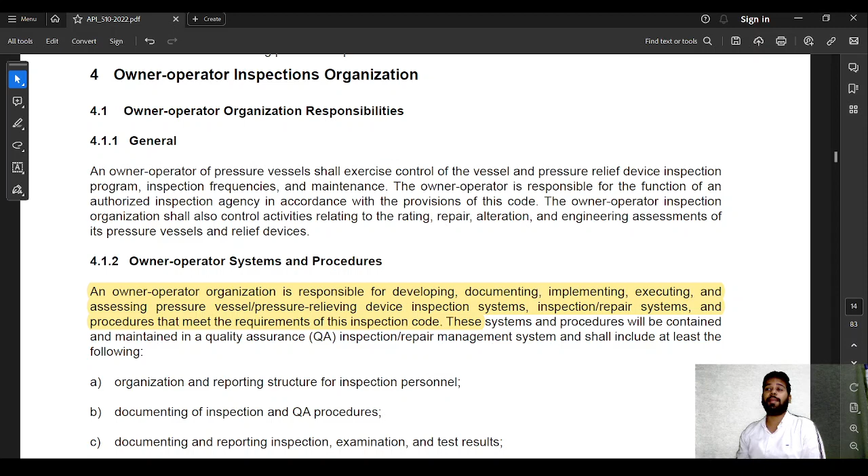In this video, we are going to talk about section 4. Section 4 lays down the requirements for owner and operator organization: what are the responsibilities for the owner or operator working with that pressure vessel, what is required for the inspector, what are the reporting requirements, and what are the qualification requirements. All of these things are laid down in section 4.

So generally, the owner operator of the pressure vessel shall exercise control of the vessel and pressure relief device inspection program, inspection frequency, and inspection maintenance. The owner operator is responsible for the function of the authorized inspection agency in accordance with the provisions of this code. This means the owner is responsible if the authorized inspection agency is not working correctly, because the owner is the one who has hired them.

Next, the owner-operator inspection organization shall also control activities related to rating, repair, alteration, and engineering assessments on the pressure vessel and relief devices.

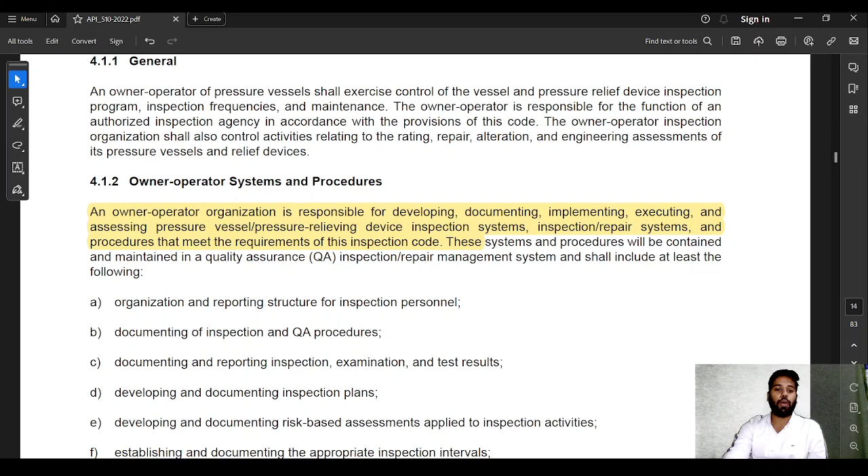The owner-operator system and procedures: an owner-operator organization is responsible for developing, documenting, implementing, executing, and assessing pressure vessel and pressure relieving device inspection systems, inspection and repair systems, and procedures that meet the requirements of this code. This means it is the responsibility of the owner that the inspection plan was developed, documented, implemented, executed, and assessed, whatever the results were after inspection.

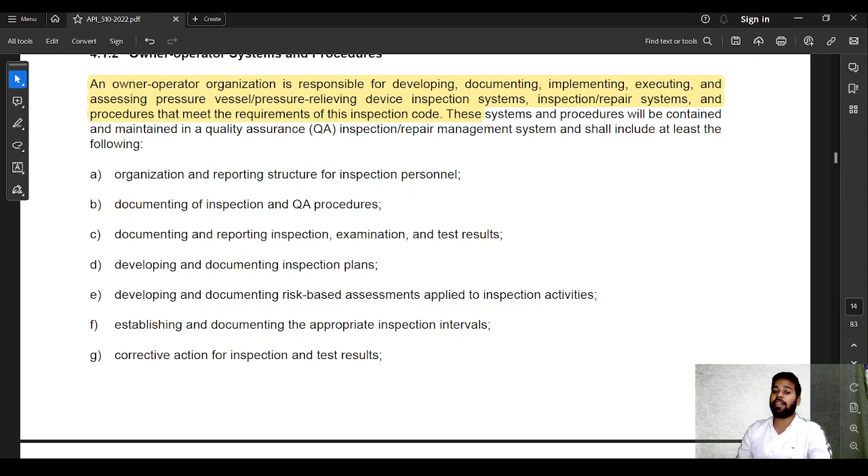These requirements and procedures will be contained and maintained in the quality assurance inspection or repair management system and shall include at least these items: organization reporting structure, documenting of inspection and QA procedures, documenting and reporting inspection and examination and their test results, developing and documenting inspection plans, and risk-based assessment applied to inspection activities.

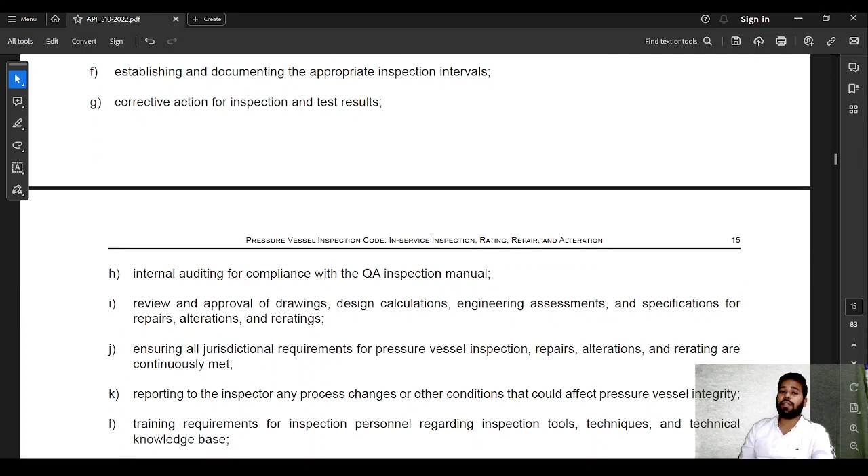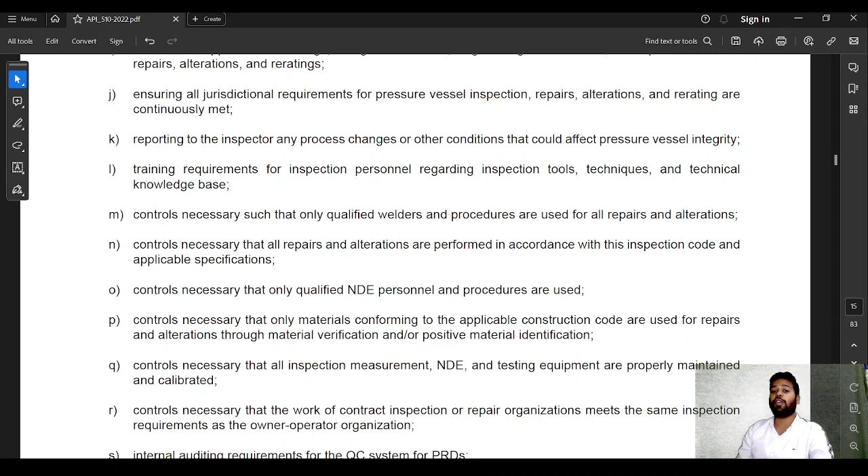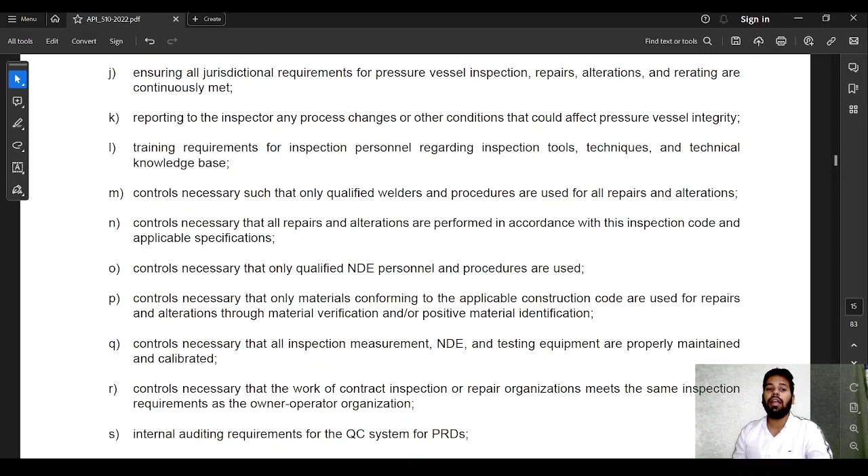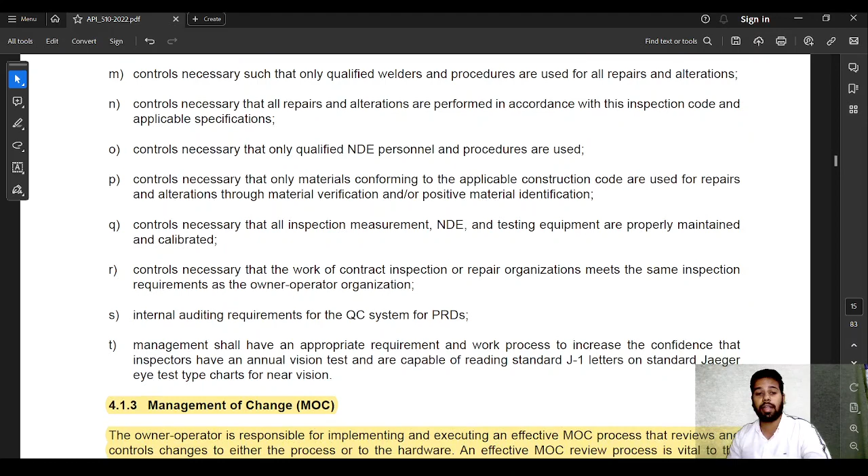Establishing and documenting appropriate inspection intervals, corrective action for inspection and test results, internal auditing for compliance, review and approval of drawings, design calculations, engineering assessment, ensuring all jurisdictional requirements for pressure vessel repair, alteration, and rerating are continuously met, reporting to the inspector any process changes or other conditions that could affect the pressure vessel's integrity, training requirements for inspection personnel, controls that only qualified welders are welding, and controls that only qualified non-destructive testing personnel are working. All of these things are the responsibility of the owner organization.

Next is management of change. If any change is happening in the organization, how that change gets managed is known as management of change. It is also the responsibility of the owner and user to have good management of change requirements or procedures. The owner operator is responsible for implementing and executing an effective MOC process that reviews and controls changes to either the process or the hardware.

An effective MOC review process is vital to the success of any pressure vessel integrity management program, as it allows the inspection group to address issues concerning the adequacy of the pressure equipment design and current condition for proposed changes, anticipate changes in corrosion and other types of damage, and update inspection plans and records to account for those changes. The inspection group shall be involved in the approval process for changes that may affect the pressure vessel's integrity.

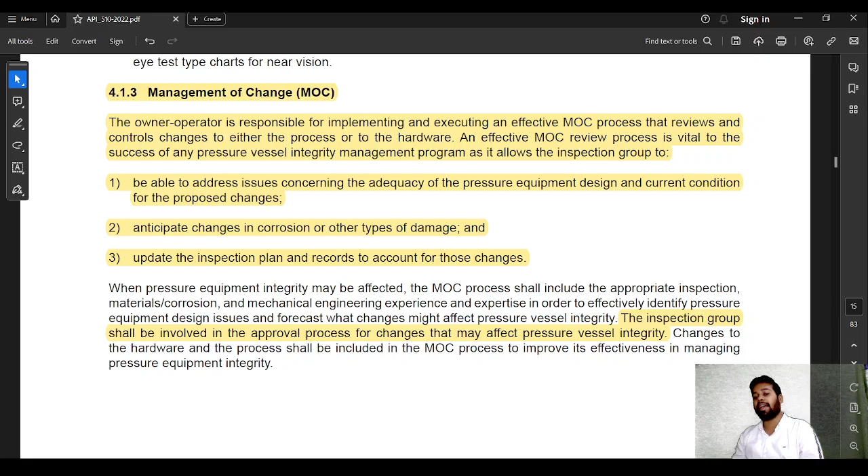Next is integrity operating window. Understand, this is a very important concept. Integrity operating window is basically a range in which, if your pressure vessel works, this is the intended service. For example, if my pressure vessel can work between minus 10 degrees Celsius to 600 degrees Celsius, then minus 10 to 600 degrees is the working temperature, where the lower limit is minus 10 and the highest limit is 600 degrees Celsius.

In this case, minus 10 and 600 is known as the integrity operating window.

That means in this window, my equipment is integral, my equipment is designed for catering to this temperature range. If the temperature goes below -10, or if it goes above 600, then it is going to cross this window, and this is known as IOW exceedance, that is, integrity operating window has been exceeded.

Now this is just an example that I have taken temperatures, but the integrity operating windows can be for multiple parameters. You can have integrity operating windows mentioning temperatures, pressures, pH, flow rate, velocity. Multiple things can be there, but whatever is the safe working area of your equipment is generally considered to be an integrity operating window.

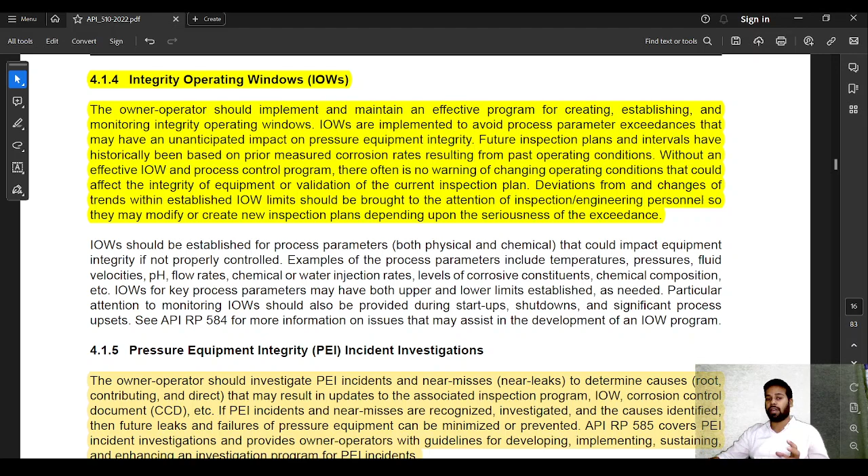IOW should be established for process parameters, both physical and chemical, that could impact the equipment integrity if not properly controlled. Examples of the process parameters include temperature, pressure, fluid velocity, pH, flow rate, chemical or water injection rates, levels of corrosive constituents, chemical composition, etc.

IOW for key process parameters may have both an upper and a lower limit established as needed. Particular attention to monitoring IOW should also be provided during startups and shutdowns and significant process upsets.

How to identify this IOW, how to identify this integrity operating window, is written in API RP 584.

Now, pressure equipment integrity and incident investigations. These are two new paragraphs that are added to API 510 in 2022. They will lay down these requirements.

So, pressure equipment integrity: the owner operator should investigate pressure equipment integrity incidents and near misses to determine the root cause, contributing and direct that may result in updates of the associated inspection program, IOW, corrosion control document, etc.

If PEI incidents and near misses are recognized, investigated and causes identified, then future leaks and failures of the pressure equipment can be minimized or prevented. How to do this PEI is covered in API RP 585.

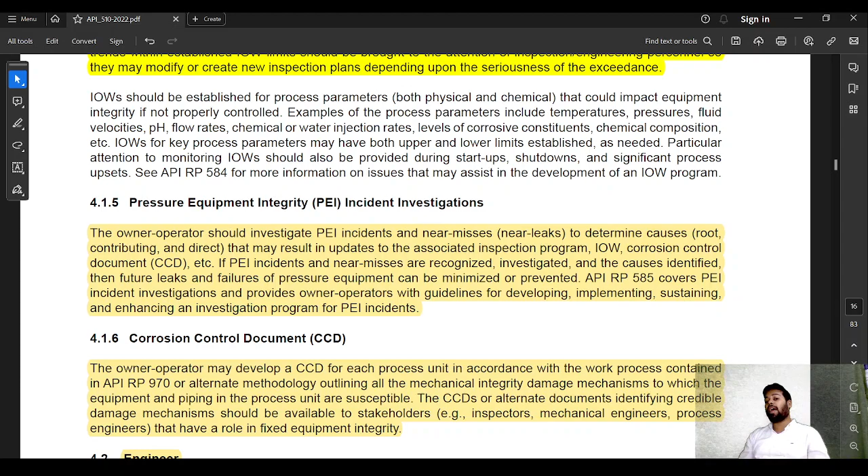Corrosion control document. The owner user may develop a corrosion control document for each process unit in accordance with the work process contained in API RP 970, or alternate methodology, outlining all the mechanical integrity damage mechanisms to which the equipment and the piping in the process is susceptible.

The CCDs, or corrosion control documents, or alternate documents identifying the credible damage mechanism should be available to the stakeholders, that is inspector, mechanical engineers, process engineers, that have a role in fixed equipment integrity.

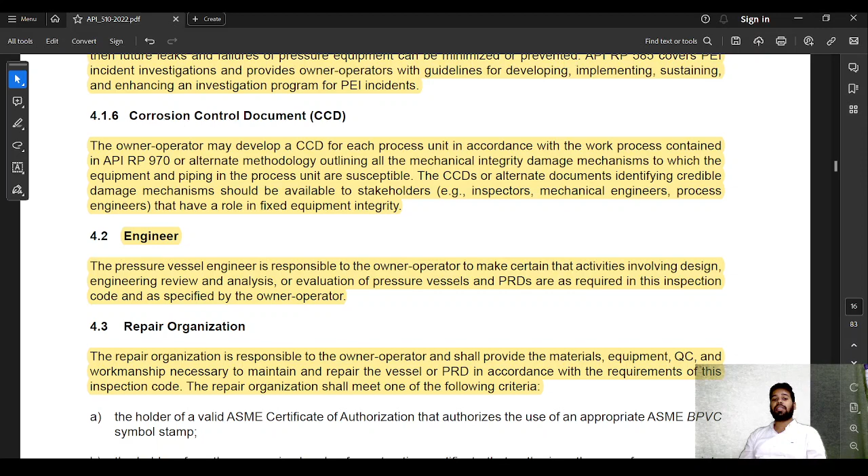Engineer - who is an engineer, sometimes these things are asked. So engineer is a pressure vessel engineer that is responsible to the owner operator to make certain that the activities involving engineering, design, review and analysis or evaluation of the pressure vessels and pressure relieving devices are required in this inspection code and are specified by the operator and owner.

Repair organization. Now in most cases the repair organization is going to be a different organization. So what is a repair organization?

Repair organization is an organization that is only brought in, in most cases during shutdown operation, so they can carry out the repair of the pressure equipment. This pressure repair organization is generally a different organization. Sometimes it is a different organization within the same parent company, sometimes that's the case, but in most cases it's a different organization altogether.

This repair organization is responsible to the owner operator. So again, if this repair organization doesn't work correctly, then still the blame lies with the owner or user, because they have hired some incompetent people. Whatever the requirements of the repair organization, it is going to be responsible to the owner and user.

An operator shall provide material, equipment, QC and workmanship necessary to maintain and repair the vessel or pressure relieving devices in accordance with the requirements of the inspection code. The repair organization shall meet one of the following criteria: the holder of a valid ASME certificate of authorization that authorizes the use of the appropriate ASME BPVC symbol stamp.

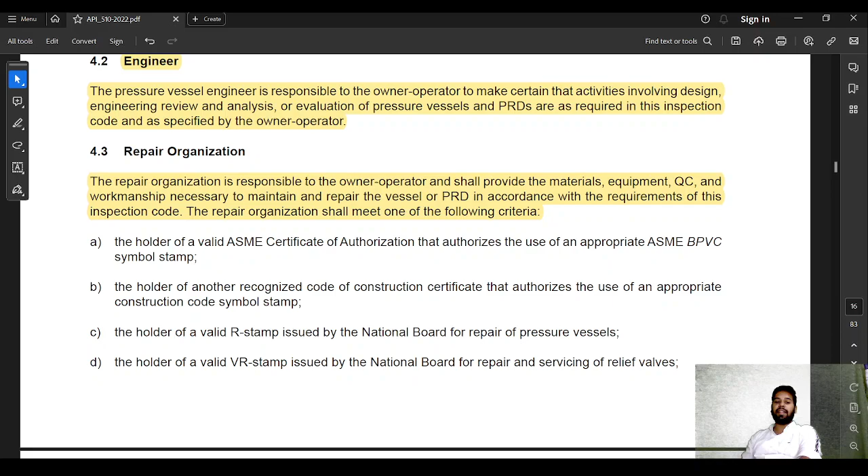Owner operator of the pressure vessel or relief valve who repairs his or her own equipment in accordance with this code, and the repair contractor whose qualifications are acceptable to the pressure vessel owner operator, an individual or organization authorized by the legal jurisdiction to repair the pressure equipment or pressure relieving devices. If any of these are followed, then an organization can be a repair organization.

Next is an inspector. Throughout the entire document, the inspector is the person who holds an API 510 certificate. The inspector is responsible to the owner operator to assure the inspection, non-destructive examination, repair, alteration and pressure testing activities meet the API 510 code requirements.

The inspector shall be directly involved in the inspection activities, especially visual inspection, which in most cases will require field activities to confirm the procedure and inspection plan are followed.

The inspector may be assisted in performing inspections by a properly trained and qualified individual acceptable to the owner operator. However, all non-destructive results shall be evaluated and accepted in accordance with API 510 by the inspector, who then will make appropriate recommendations for repair, replacement or fitness for continued service. The inspector shall be certified in accordance with the provisions of Annex B.

The inspector can be an employee of the owner or can be a contractor acceptable to the owner operator. This means that whatever repair is getting carried out, whatever inspection is carried out for a pressure vessel, the inspector is responsible for all of these things, and he is also responsible to the owner.

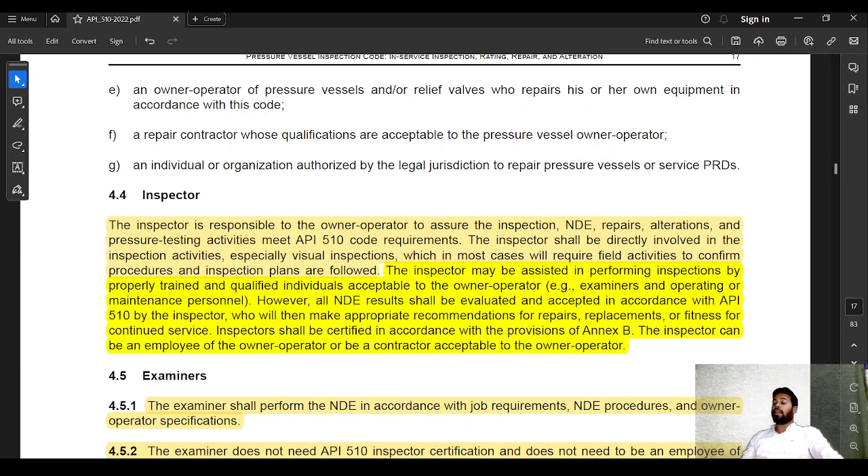Examiners are the persons who perform non-destructive examination. The examiner shall perform non-destructive examination in accordance with job requirements, non-destructive examination procedures, and the owner's or operator's specification. The examiner does not need API 510 inspector certification and does not need to be an employee of the owner and operator. He can be an employee of the owner or he can also be a third-party inspector.

The examiner does need to be trained and competent in non-destructive examination procedures that are used, but may be required by the owner operator to prove competency by holding certification in those procedures. Examples of certification may include SNT-TC-1A certification, ASNT CP 189, CGSB, or AWS QC1.

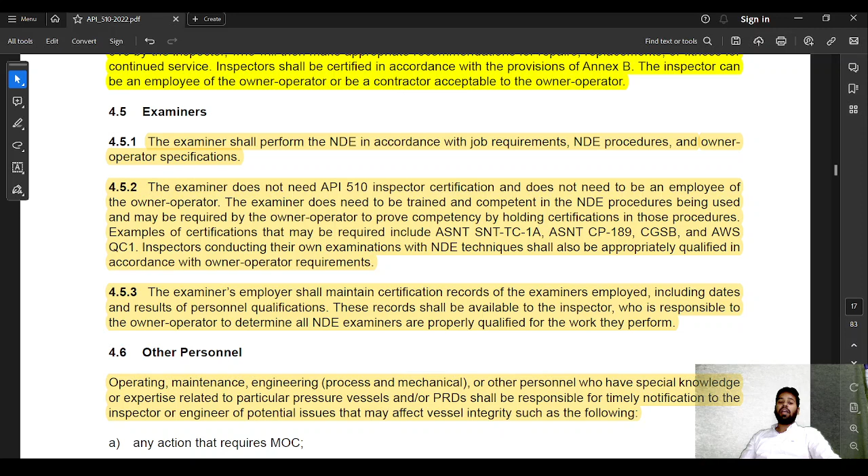Inspectors conducting their own examination with non-destructive examination techniques shall also be appropriately qualified in accordance with owner-operator requirements. Examiner employers shall maintain certification records for the examiners employed, including dates and results of personnel qualification. These records are available to the inspector, who is responsible to the owner operator to determine all non-destructive examiners are properly qualified for the work they perform.

Other personnel also support the inspector in carrying out this kind of inspection. There can be multiple personnel - operating staff, designers, engineers, corrosion specialists, people responsible for the working of the equipment. All of these are other personnel that support the inspector in carrying out his duties.

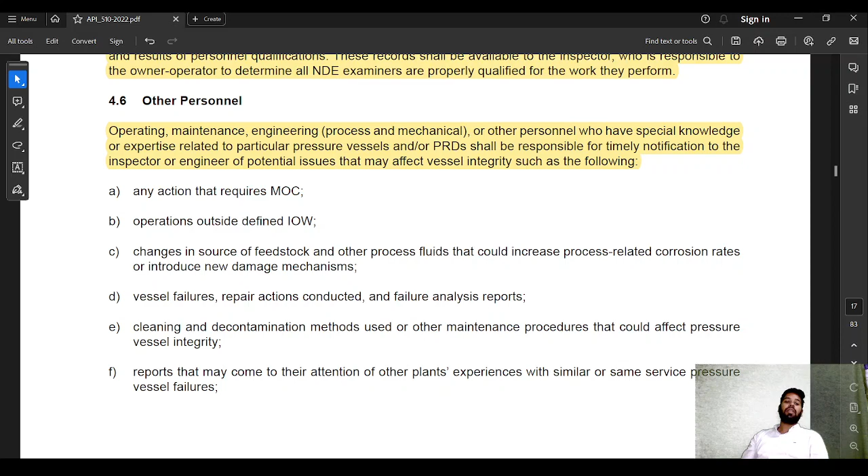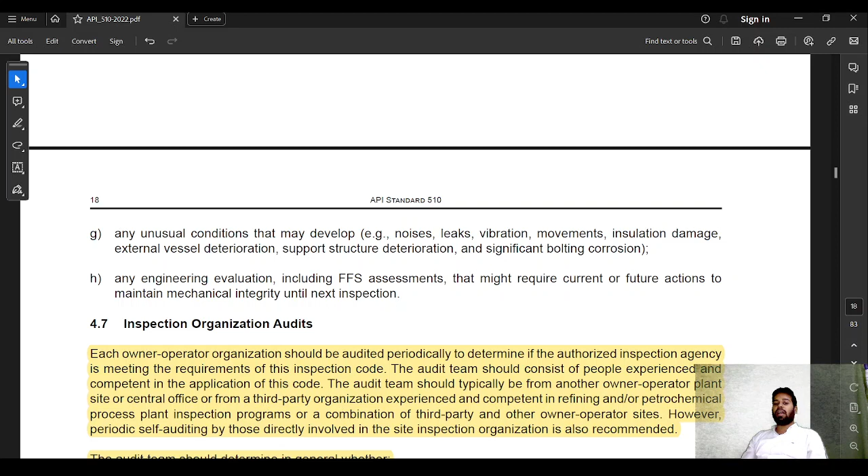Operating, maintenance, engineering and other personnel who have special knowledge or expertise related to particular pressure vessels or pressure relieving devices shall be responsible for timely notification to the inspector or engineer of potential issues that may affect vessel integrity, such as: any action requiring MOC, operations outside defined IOWs, changes in source of feedstock and other process fluids that could increase process related corrosion rates, vessel failures, cleaning and decontamination methods, reports of other plant experiences with similar service, any unusual conditions that may develop, and any engineering evaluation including FFS assessment that might require current or future actions.

Next is inspection organization audit. Whoever is the inspection organization running this inspection, that organization also needs to be audited so that the owner user can be satisfied that they are competent enough.

Each owner operator organization should be audited periodically to determine if the authorized inspection agency is meeting the requirements of this inspection code. The audit team should consist of people experienced and competent in the application of this code, typically from another operator plant, site or central office, or a third party organization experienced in refinery and petrochemical process plant inspection programs, or a combination of third party and owner operator sites. However, periodic self-auditing by those directly involved in the inspection organization is also recommended.

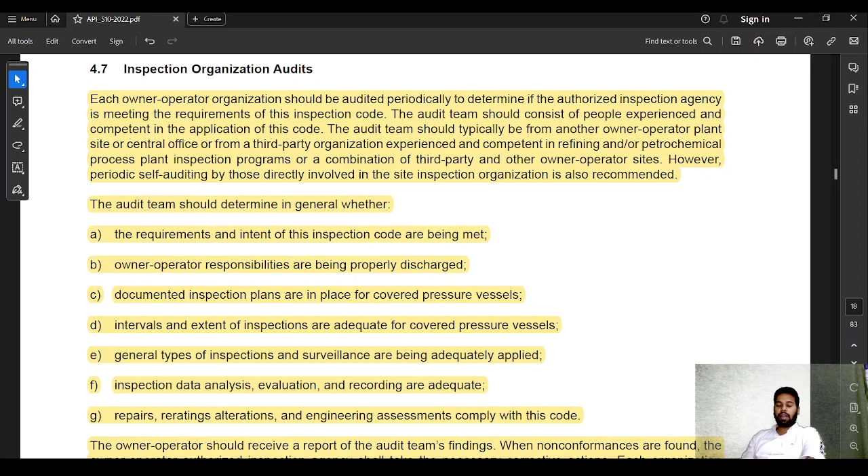That is, periodic internal audit should also be taken into consideration. The audit team should determine in general whether the requirements and intent of this inspection code are being met, owner-operator responsibilities are properly discharged, documented inspection plans are in place, interval and extent of inspection are adequate for covered pressure vessels, general types of inspection and surveillance are adequately applied, inspection data analysis, evaluation and recording are adequate, and repair, re-rating, alteration and engineering assessment comply with this code.

The owner-operator should receive a report of the audit team findings when non-conformances are found. The owner-operator authorized inspection agency shall take necessary corrective action. Each organization needs to establish a system for tracking completion of the corrective action generated from the audit finding. The resolution of the audit finding should be made available to the audit team for review, and this information should be reviewed during subsequent audits.

So these are the requirements needed by the owner, user or operator. In this section we have seen who is an inspector, who is an engineer, who is an owner, who is an inspection organization, who is a repair organization, and what are some responsibilities of these organizations - the responsibilities of the owner, user, inspector, and repair organization. All of these things are laid down here.

In the next video we are going to talk about inspection, examination, and pressure testing practices. The meat of this code is generally going to be in section 5, because section 5 is going to tell you how inspection is going to get carried out for the pressure vessel. Okay, that's it for this video. In the next video we'll be talking about section 5 of API 510 code. That's it for this video. Thank you.